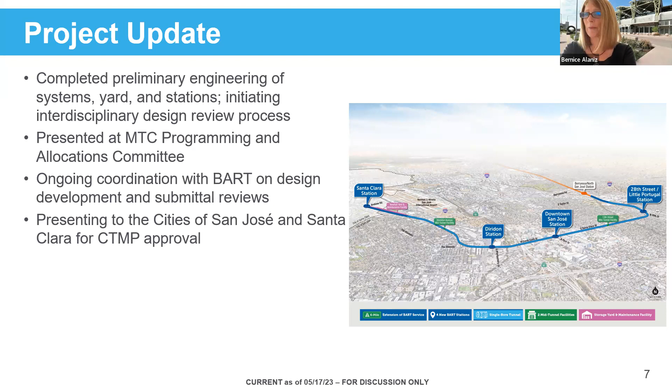And we've been doing ongoing coordination with BART on the design development submittals, as I mentioned, they review. We are the owner, designer, funder, but BART will be the operator, so we work in close coordination with them. And then we are presenting this month and next to both the San Jose City Council and the Santa Clara City Councils for the Construction Transportation Management Plan, which you'll get further details on today. We can go to the next slide.

So a funding update. As you may recall, earlier in the year we transitioned from what was the expedited project delivery pilot program to the traditional New Starts program—the program where we got the federal funding and executed a grant for $900 million on the Berryessa project. Right now we're looking at about a $4.6 billion ask. We entered that program in the first stage, called the project development stage. Next month we're actually going to make our application to get into the next stage, where we present our 30% design and get into the engineering phase of the FTA Federal New Starts funding program.

And then the final phase, which will be later this year or early next year, we'll be making the application for our full funding grant agreement. That is really the contractual agreement that states the amount and time frame of the money we're going to get from the federal government.

This shows our funding plan: a $4.6 billion federal share, $375 million regional share, $375 million yet to be determined, a little over $1 billion from the state, and just under $3 billion locally.

Tunnel and track work update. As we've shared earlier, we are delivering this tunnel and track work contract, the biggest of the 4 contracts, through what's called Progressive Design Build Delivery. Progressive Design Build means we bring the contractor on very early during conceptual design and work with them side by side through an open book process to advance the design.

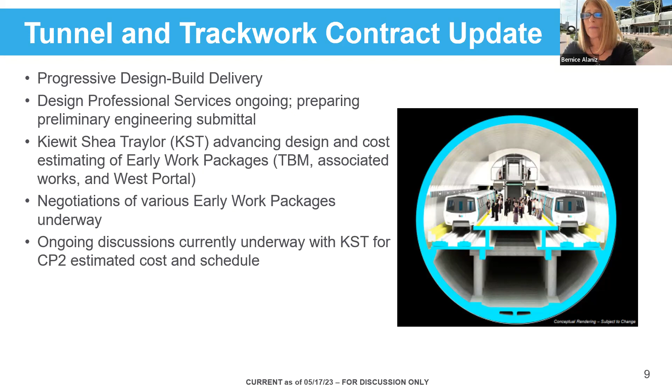We're still doing negotiations as part of this open book process. That allows the owner to have a little more control over the cost, and that's what we're working on right now: the updated cost and schedule.

These are the 4 contract packages I mentioned. The CP2 tunnel and track work contract is one of 4. While we went with Progressive Design Build for that, we are now going to pursue the other contracts through more of a traditional design bid build. We'll advance the design more on the project owner side, the VTA side, and then put those contracts out for bid. One of those is the systems contract — everything to make it an operational rail system: communications, electrical, all of that.

Then there's the Newhall Yard and Santa Clara Station in a separate contract, and then the 3 we call underground stations. That reflects the below-ground boarding, but they all have an above-ground portion, what we call the station head house, which is what we'd all refer to as a station building.

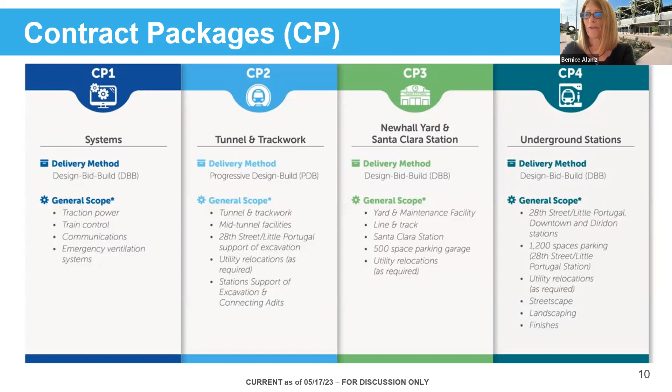Procurement look ahead — got a couple questions on this, so I'll clarify. We're looking to bring on a construction management consultant, who will oversee the management of the actual construction. They manage the contractors doing the construction and also do quite a bit of the QA quality assurance. We've had, since the inception of this project in 2016, a program management consultant.

They oversee the overall program, all of the aspects — they have staff putting together materials for the federal funding, they've been working on the design, and they direct our general engineering contractor that we also have on board.

We have all of our construction procurements — the second phase for the CP2 contract. Right now we're in phase 1 with the design, and we'll actually be awarding them when the tunnel boring work starts. Then we have the other construction procurements for those 3 other contracts I talked about, which will occur between 2024 and 2025.

This is our project look ahead. We're going out right now to 2028 with a 5-year look ahead. Right now we're just about getting to the point between 2023 and 2024 where we will request to get into the New Starts engineering phase. We start some early construction work right around the time we get our full funding grant agreement, mid-2024, and then we start major construction around the 2025 timeframe.

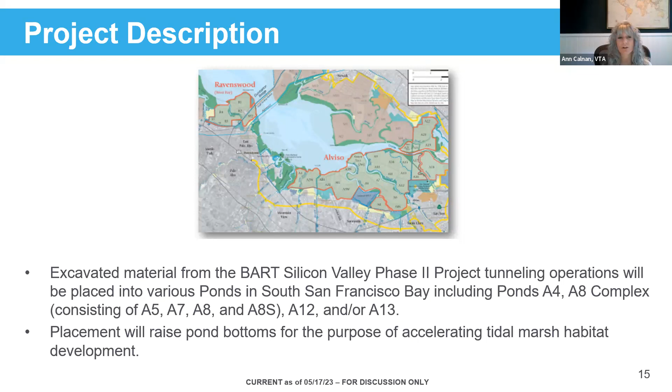There are several key benefits to reusing the tunnel material in this manner. Raising the pond bottoms to enable habitat restoration will help address sea level rise. If the ponds were to rely only on natural processes given sea level rise, the buildup of the pond bottoms and ultimate habitat development would take even longer. The project also addresses greenhouse gas emissions, as disposing the excavated material in landfills in the South Bay and beyond requires truck hauls of much longer distances. The EIR in the environmental document from 2018 called out disposing the material in landfills - there's quite a bit of material, and it cannot just go to local landfills, it has to go to landfills that are farther away. So the salt pond option for disposing this material is much closer, relatively, to the South Bay - close to the West Tunnel portal where all this excavation material will originate. It's about 7 or 8 miles away.

Speeding up the timeline for tidal marsh restoration will ultimately create habitat for threatened and endangered species. The excavated material will also cover existing mercury contamination in some of these ponds resulting from historical mining operations. Restoration of the salt pond also addresses flood risks. And lastly, the reuse project avoids wasting all this excavated material that otherwise would go to the landfills.

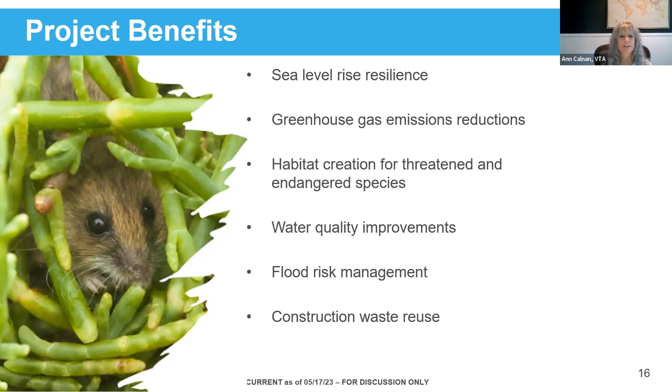What I'm showing you here on the left is the cover of the BART Silicon Valley Sustainability Master Plan, and on the right are 5 broad categories for what's called the Envision Sustainability Rating System. In July 2021, we finalized the Sustainability Master Plan, and in this plan it's noted that VTA is pursuing an Envision Platinum certification, the top certification from an organization called the Institute for Sustainable Infrastructure.

Reuse of the tunnel excavated material at the salt ponds earns us considerable points in the Envision framework in order to meet that platinum goal. Most notably, the points are gained in the natural world category and climate and risk category. Reusing the material at the salt ponds is the most sustainable option compared to other disposal options that have been suggested.

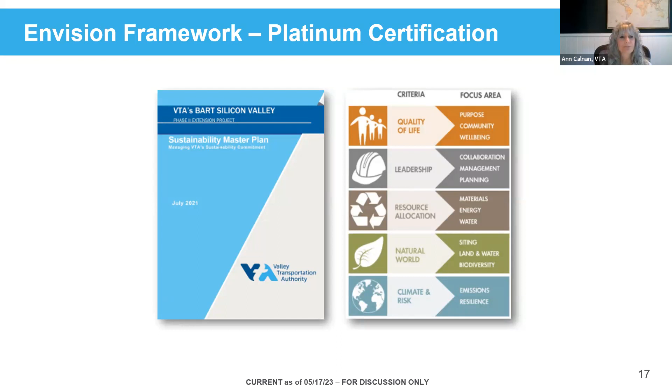The idea of taking the material to the salt ponds is not new, since we've been exploring it for a while, but it became real after we met with a regulatory group called the Bay Restoration Regulatory Integration Team. Those are high-level regulators, and we just met them in January this year. Following that meeting, they placed this project on their priority list. As a priority project, we will work cooperatively with the regulators to expedite project permitting, which is a critical path for project success.

Another update: the California State Coastal Conservancy awarded us $1.5 million in grant funding towards the environmental clearance and permitting phase for the reuse project. Just a couple of days ago, I talked to the California Wildlife Conservation Board about a grant for the design phase, which primarily consists of the construction methodology, how you place the material into the ponds, as well as work related to addressing the Water Quality Control Board's Quality Assurance Project Plan, or QAPP, to make sure that all the material placed into the bay is clean, with no contaminants that would harm aquatic systems in the bay.

Finally, we are embarking, including this tonight, on a robust community engagement process to get the word out about this project and to get feedback as well.

Last slide, I do want to highlight that this is a highly collaborative project with all the regulators, state and federal. There are partners, such as the Coastal Conservancy and Valley Water, which owns one of the ponds. The partnership to date has been very productive, and we're looking forward to continued engagement with these partners, as well as other interested stakeholders and the public. And with that, I'm happy to answer any questions.

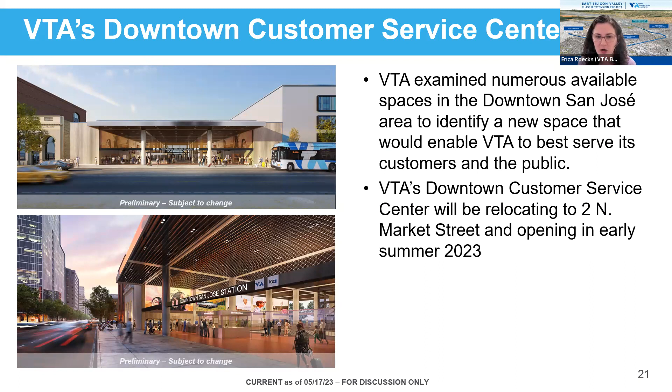A little bit more about what happens in the space: it serves the surrounding community and assists transit users with general inquiries and other requests related to maps, scheduling, purchasing Clipper cards, applying for regional transit connection discount cards, etc.

In addition to relocating the customer service center, we will also be opening a phase 2 project public information office at the same location before construction begins in the area. At this office, members of our project outreach team will help educate and provide updates to the local community about the progress of the project. As for the 28th Street station area, we are still actively looking for space for our public information office there, and we're open to suggestions if you have any. That's the update on the customer service center and public information offices.

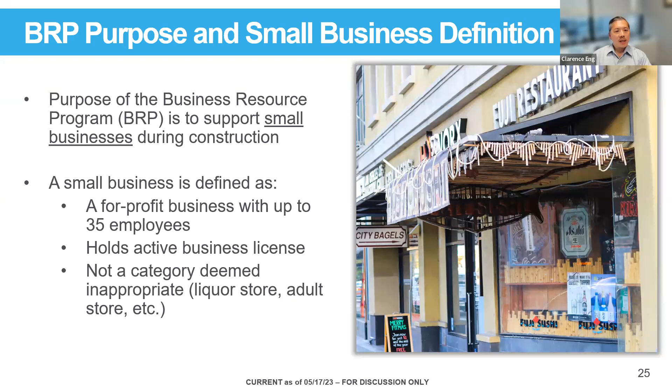In developing the business resource program, we've interacted and discussed with the VTA Small Business Task Force, including a presentation earlier this week. We've evaluated other case studies in terms of business assistance around the country, conducted interviews with business resource providers to understand what resources they can provide, and surveyed small businesses as part of the CTMP to get a better understanding of their needs. We've also consulted other transit agencies who have delivered similar business resource programs and identified what worked, what didn't, and lessons learned navigating the process.

You'll see some of the results. A foreshadow is really just trying to help those smaller businesses as quickly as possible, and so VTA has really tried to be nimble through this process.

As part of the plan development, we've identified, with the help of JC Lacey, four program elements: shop local marketing, signage and wayfinding, small business resource connections and support, as well as direct financial assistance. I'll walk through the next series of slides showing how we've refined that and taken a closer look at how it may apply in this area.

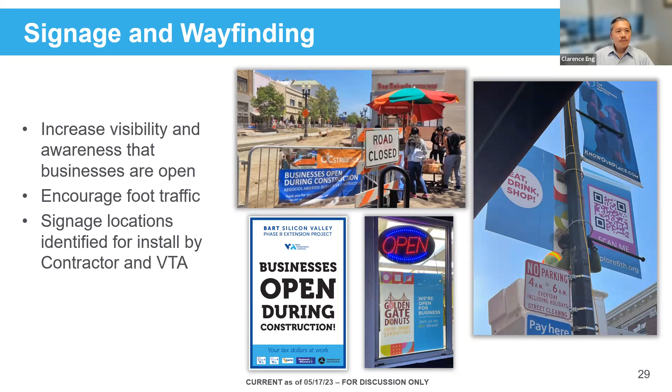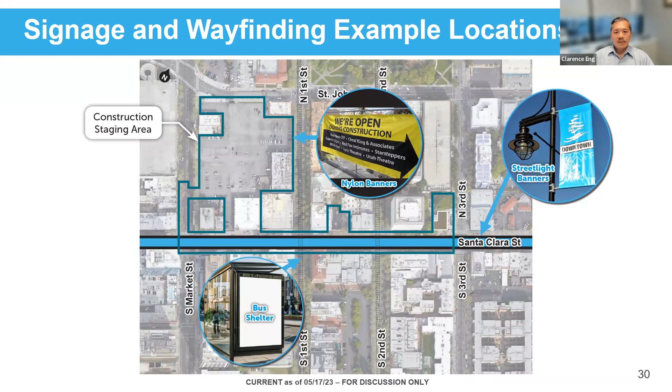The third element is small business resource connections and support, trying to rally around and create a sense of support for these smaller businesses, having a referral list of small business organizations that provide existing services, from accounting to web support and things like that. VTA will sponsor open houses enabling business owners to meet up with these business resource providers and help provide additional support for their business.

Additionally, web-based training events - there are a lot of different resources that we've identified and that we'll be bringing to the community and the businesses through this initiative. These first three are really intended to be implemented prior to the start of construction, helping the businesses be more resilient through the construction phase.

The fourth element is small business direct financial assistance. There will be funds available to support small businesses through grants, meaning eligible small businesses located adjacent to the above ground construction and staging areas. Much of the construction will happen underground with tunneling, but these are areas where we may experience different disruptions - sidewalk closures, obstruction of signage, parking removal, and lane closures are some of those potential disturbances.

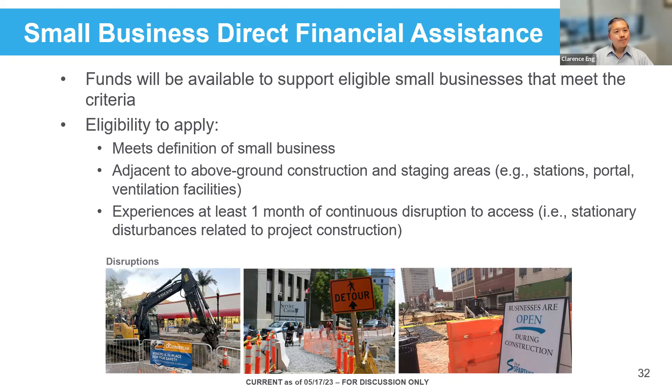So what does that mean? We've identified, and some of the details are still being worked through with VTA, a tiered assistance approach where after an initial one month of continuous disruption, businesses have access to a lower amount that can be awarded with very minimal requirements - really having a low bar enabling these businesses to have access to these funds.

And with additional disruptions, a greater amount, as well as a little bit more documentation of those disturbances and impacts. Those applications will be reviewed by the VTA program manager, and that may be a third party if there are technical financial elements that need to be verified. But really the key is to try to get these resources to the community and these businesses as quickly as possible.

This business resource program will be administered leveraging a business liaison team. It's important to have folks on the ground being a conduit between VTA and the business owners. At the start, before construction begins, we'll be regularly visiting businesses, creating those relationships that can be leveraged throughout the construction period.

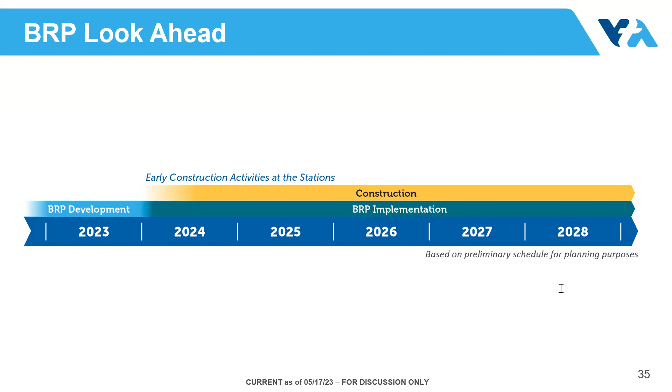Go ahead, Clarence. The reason that question's being asked is because I believe when we had the BRT, if you accepted the business interruption fund, you signed a legal waiver document saying that you would not sue VTA. We haven't talked about that, but I imagine when we meet with VTA legal that we'll get some direction to something similar. Thank you.

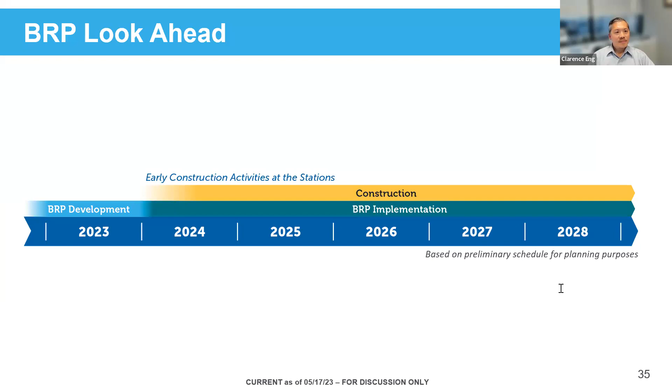There is also a question in the chat. I don't think that's a business resource program question. The question is, how is VTA helping businesses in downtown who are being asked to move out? In what ways are they being helped financially and to find a new place to locate? VTA Real Estate is the department in charge of that work related to property acquisitions for the project itself. We've shared some high-level information about that in the last round of CWGs, in the slide. We can talk with VTA Real Estate about getting a fuller answer back to this group.

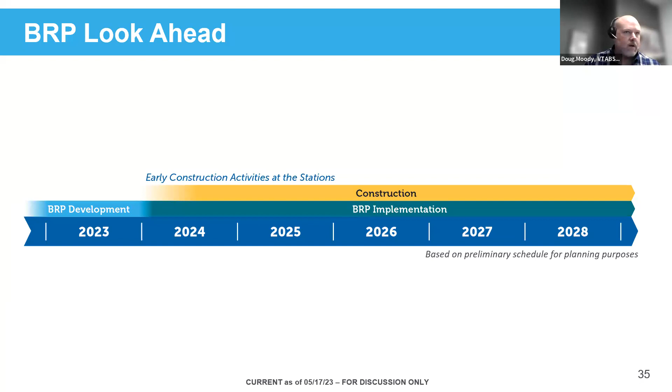That is it for the business resource program, unless there's other questions or comments. If there aren't, we're going to switch over to Erica to give an overview of early construction activities. Let me confirm. Nope, there's the one question that we just answered live. So Erica, over to you.

Great, thank you. So I've talked to you all about the construction transportation management plans multiple times before. If we can go to the next slide. A reminder that the purpose of the construction transportation management plan, or CTMP, is to minimize and reduce to the extent possible construction related transportation impacts to all modes during construction.

Many of you have seen this graphic here on the screen before, so I just want to quickly remind you of the development process for our contracts package specific CTMPs. I'm going to walk through some details of the first one on the coming slides. During the development, as Bernice mentioned earlier, Kiewit Shea Traylor is on board, the contractor for the tunnel and track work contract, which is contract package 2 or CP2. So during the development of the CP2 specific CTMPs, there's regular coordination between the contractor, VTA, and the cities.

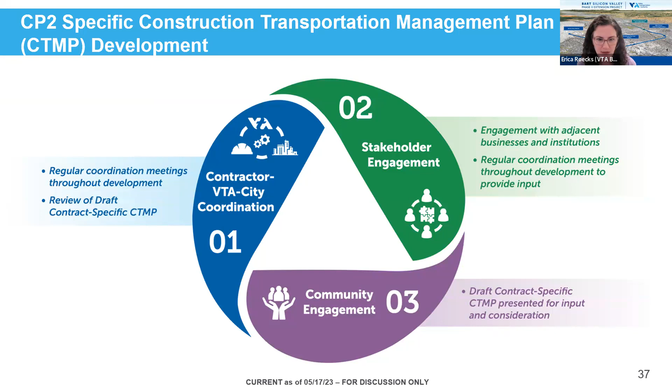In addition, there's stakeholder engagement regularly with adjacent businesses and institutions throughout the development of the CTMP, and the community was also engaged to provide input and consideration at a community meeting. In the next slide, we'll show you some pictures there.

We had our early construction activities public meetings in March that we talked to you all about in February at the February CWG. So we had an in-person meeting as well as an online meeting, and the materials are now posted online there at the link. If you didn't get a chance to participate or listen already, you can check it out there. So we connected with the general public and shared information about the early construction activities that will be happening at the West Portal site over the next couple of years.

We had over 50 folks attend the public meetings and were able to answer questions from project staff as well as a panel of the KST folks. We had a positive outcome and generally positive feedback at the meeting. Now I'm going to walk through some of those details at a high level with you here.

The goal of this early construction timeframe, which is the first CTMP that KST has developed, is for the next couple of years at the west portal only, which I'll show you on a graphic, within VTA's Newhall Yard property. The goal of this early construction activity is to prepare the site for the tunneling operation, so when the tunnel boring machine will operate and build the tunnel. The West Tunnel Portal is the beginning of the 5-mile long tunnel.

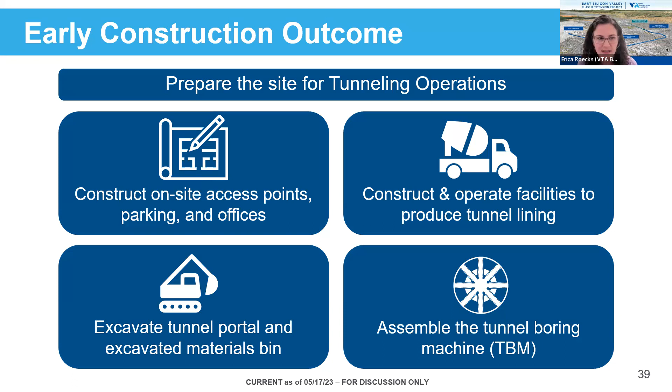Some of the activities that will happen during this 2-year preparation include constructing the on-site access points, the parking, constructing and operating a tunnel lining factory where the segments will be built, assembling the tunnel boring machine, and excavating and preparing for the tunnel boring machine. We'll go into detail on the coming slides on what that is.

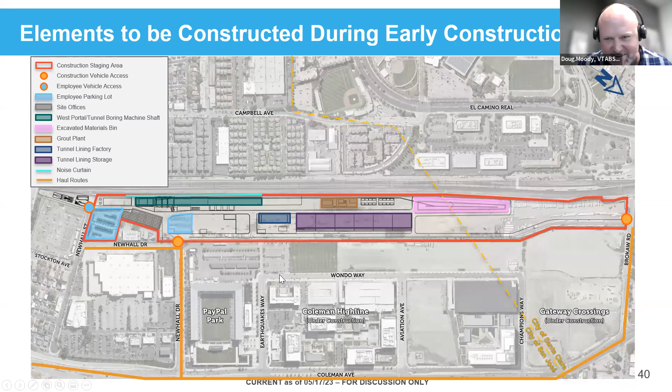I can cover the activities happening during the early works. Is she back? This is the site for the future yard, and these are the various activities that will occur during the early works, as we're calling it. Most of the activity will be in support of enabling the construction and launch of the tunnel boring machine, and to create and fabricate the liners for that tunnel boring machine.

In the area shown in dark turquoise, that is the launch site for the tunnel boring machine, and the light turquoise is where the future noise curtain will be. The light pink area on the upper right is where the excavated material bins will be, where the materials come from when they do the trench to create the large launch site for the tunnel boring machine.

That will go into that bin. The blue over on the left is where there's parking. We get lots of concerns about construction parking, so just wanted to demonstrate that we have construction parking for the craftspeople and staff that will be working there. The purple in the center is where the tunnel liners will go.

There will be a tunnel liner factory in the blue building, kind of mid-center left. That's where they will actually construct these big, huge, massive cement tunnel liners that the tunnel boring machine will place. They weigh 40,000 pounds each. It takes 9 of them to make a full circle - it's either 6 or 9, and they can do 6 or 9 segments total per day. So they will be manufacturing kind of a stockpile of them because they can't make them as fast as they'll have to place them. So in the early stages, we will be building a supply of those tunnel liners.

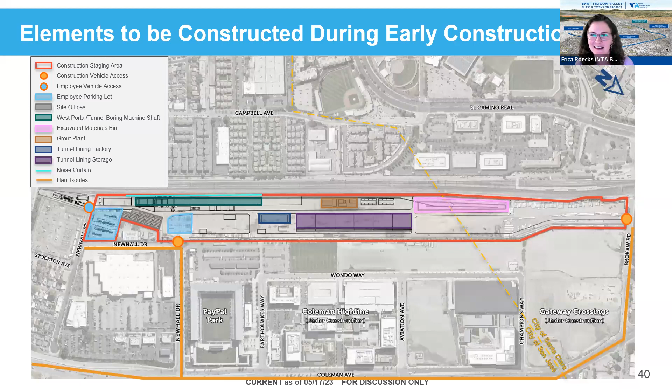So let's go to the next slide.

Additional mitigations related to construction equipment and operations that the contractor will be implementing include turning off idling equipment, lining truck beds with materials to reduce noise, covering hoppers, bins, and chutes with sound deadening materials, and installing low impact backup alarms for use during nighttime hours, so it sounds more like a swoosh than a beep. Those are some of the examples of things that are being done.

If you go to the next slide.

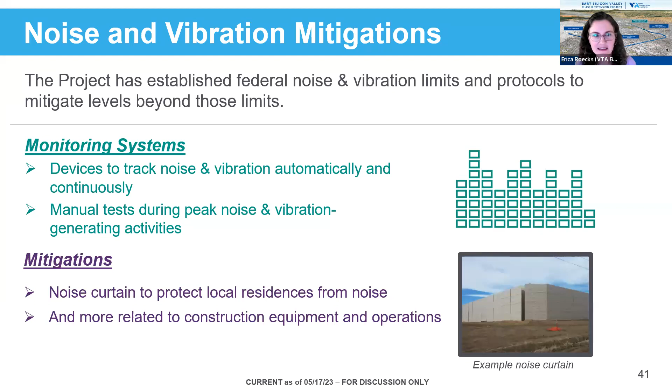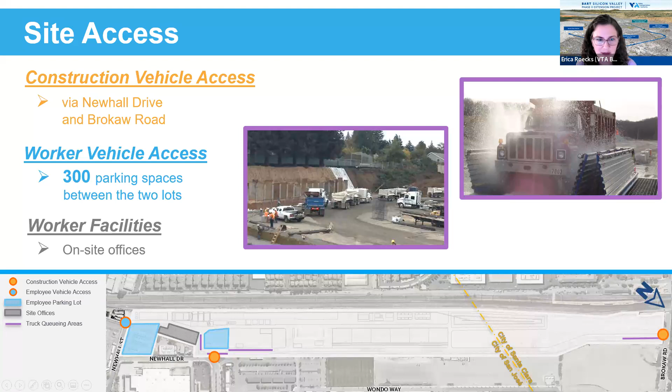Next slide. So at a high level, as all these activities are happening within VTA's property, from a transportation perspective, likely what you'll see is increased truck traffic in the area, some construction signage, and behind the fencing screening, activities happening within the yard for extended hours, which I'm going to touch on more in the next slide.

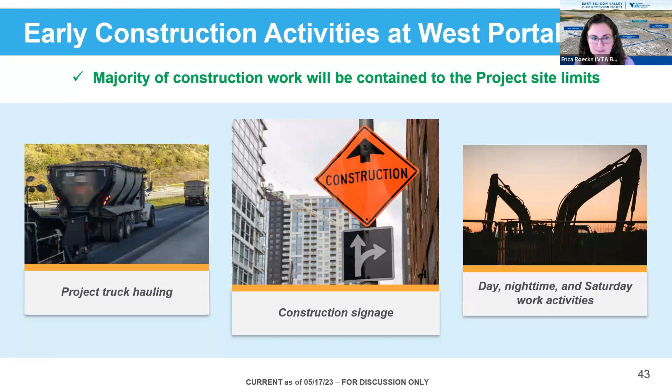Double shifts begin at 6 a.m. in the morning and last until 4 a.m. And Saturday is 6 to 6.

Now we can go to the next slide.

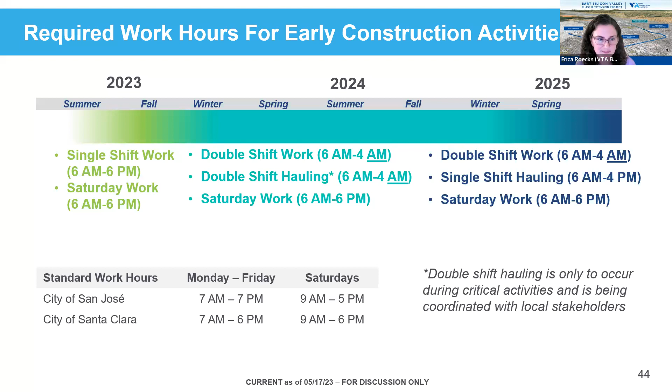Before the launch of the tunnel boring machine, 360 segments need to be constructed or fabricated. There are 9 segments that create a ring, and the factory can fabricate 6 segments per day. So 360 need to be fabricated before the launch, which is only 13% total of what will be needed.

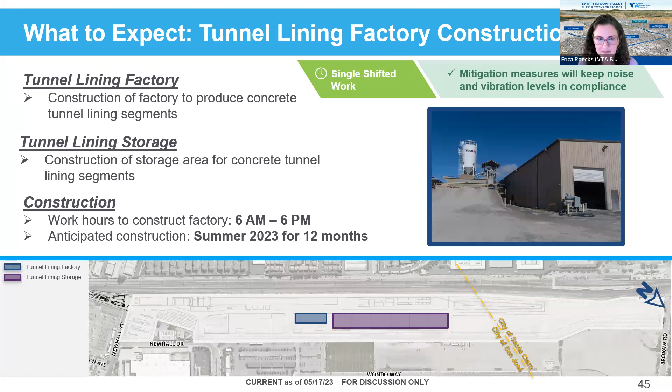The fabrication within the building helps to reduce the production sound. The factory must keep up longer hours to ensure the production of segments keeps pace with the daily use of the tunnel boring machine. So the factory will operate from 6 a.m. to 11 p.m. from the fall of 24 through major construction.

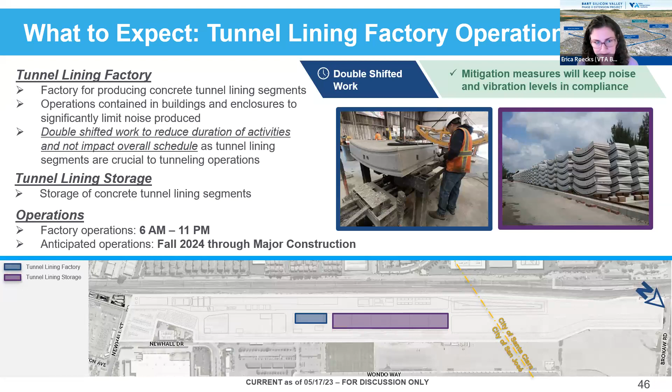Next slide. In the following slides, we're going to give some more details and images associated with preparing for launching the tunnel boring machine, which will begin the preparing of the site in order to launch, starting in fall of 23 for about 14 months.

Here on the screen, on the left is a picture of a tunnel boring machine being assembled, and on the right is a picture of some of the equipment required for those deep slurry walls with some rebar cages there.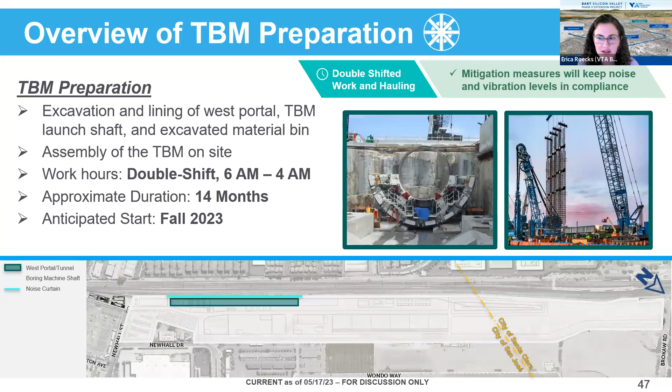If you go to the next slide. The support of excavation, or SOE, is required as part of the preparation for the tunnel boring machine. SOE construction creates the concrete walls below the ground to aid the excavation and create space for the tunnel boring machine to be assembled. The support of excavation construction of the TBM shaft and the portal is the area shown in green on the graphic at the bottom.

This requires using excavation equipment, trucks hauling concrete in and excavating material out of the site, and other heavy equipment to dig the slurry walls 160 feet deep and to accommodate the 80-foot excavation that the TBM will launch from. This will be double shifted work, 22 hours a day, with double shifted hauling to accommodate the critical concrete pours in the complex sequence of work required to build these shaft walls.

And the image there on the right is that image of the sound curtain again.

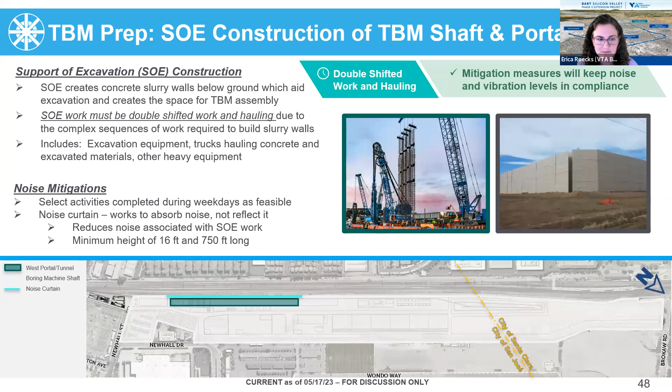Next slide. The image here shows an example of an excavated materials bin, which is where the soils will be stored eventually during major construction. This phase of work requires excavating the existing soil in the area at the placement of the bin, followed by lining and installing retaining walls to further build out the bin.

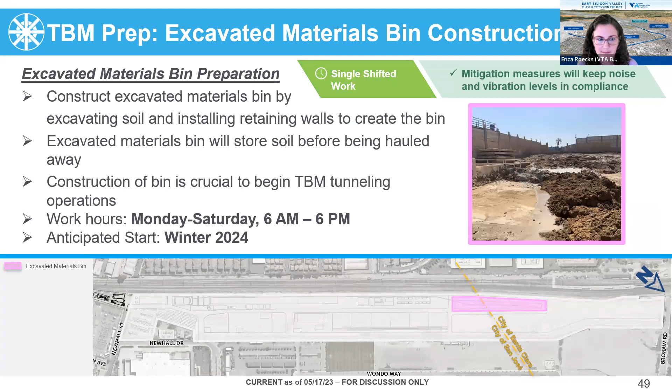In order to begin digging, the TBM requires a launch structure to push off of, and this is where the TBM support structure comes into play. It helps to push the TBM forward until it's able to propel itself from the tunnel liners that have been installed. The image on the right shows the launch structure, support around the tunnel boring machine, and the image on the left is of the tunnel boring machine as it's starting to move.

The launch platform construction must be double shifted and completed before the tunnel boring machine arrives on site to be reassembled on that platform. When the TBM arrives, work to assemble it will be double shifted to ensure that tunneling begins. The work to prepare the support structures and assemble the tunnel boring machine is not anticipated to produce high levels of noise.

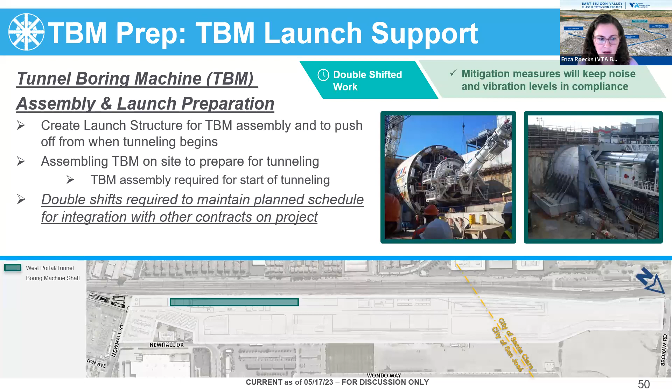Next, we want to mention some of the ways that we'll be reducing dust in the area. As we all know, construction creates dust in the air and such.

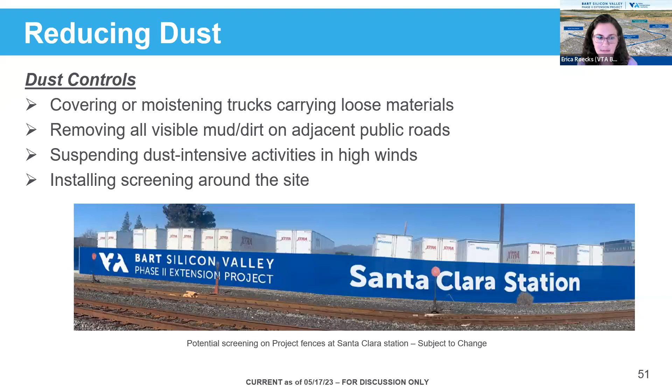The contractor will be covering or moistening trucks carrying loose materials, suspending dust intensive activities in high winds, and removing visible mud and dirt off the trucks and on the adjacent public roadways, as we showed in the pictures earlier. In addition, we'll be installing screening around the site. An example of what this could potentially look like is what you see here on the bottom, which we're working through right now in advance of construction.

Lighting is critical to safe construction operations when we're operating 22 hours a day. But in order to minimize the ambient light affecting nearby residences and businesses, we'll be using lights that direct downwards towards work activities, similar to what you see here. The number of lights will be minimized to the extent that construction safety allows.

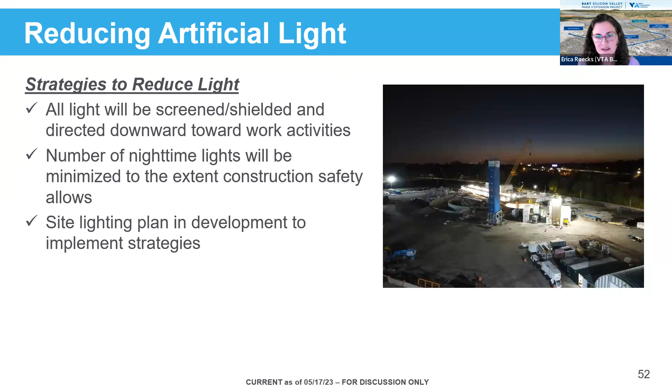There's a site lighting plan in development to implement the strategies described. So those are some of the details of what's happening in this first time period of 2 years for these early construction activities. Just for the CP2 contract alone, there are 4 CTMPs anticipated. This covers the early construction activities at the West Portal.

KST has already started to develop the next CTMP, which covers early and major construction at Diridon, Downtown, and 28th Street Little Portugal stations. They anticipate a CTMP to cover major construction at the West Portal once the tunnel boring machine launches, and then a 4th one for the East Portal.

In addition, once the additional contractors come on board, there will be more CTMPs, and we will be coordinating with several of you in the very near future on some of the details that KST is developing related to major construction in the 28th Street Station area.

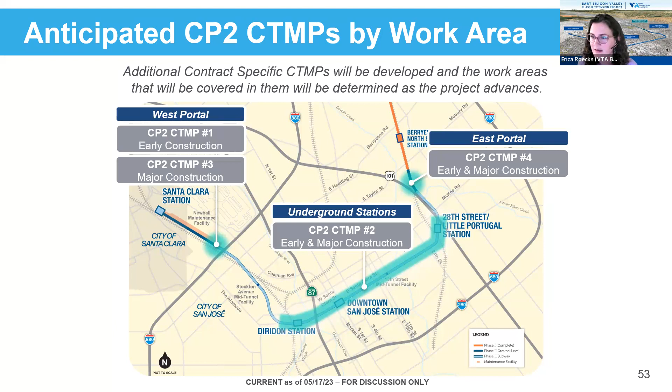I think I just have a couple last slides here to cover. Our project team will be performing construction related surveys and monitoring. We've talked about the historic building monitoring program here before throughout the project. The goal is to assess and develop a baseline of the current architectural and structural conditions, perform monitoring throughout construction, and conduct post-construction surveys. This is something we did some initial research on before, but are starting to dive into deeper now that KST is on board.

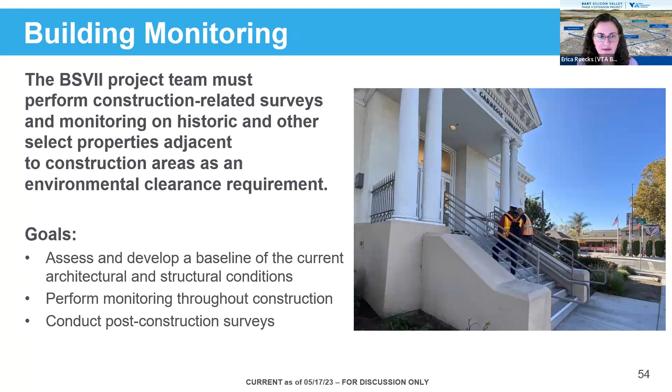Some of the activities for building monitoring that will be happening in the future include general assessments, surveys, pre-construction surveys, air, noise, and vibration monitoring, and property protection instrumentation and monitoring. VTA is coordinating with specific property owners as needed to conduct these activities over the next couple of years, and we'll be in touch potentially as needed. Just wanted you to be aware that we're advancing this program and making sure that we're protecting properties as we advance and begin construction.

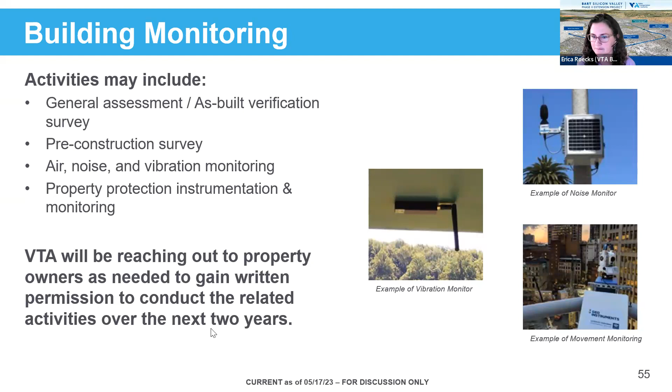Okay, moving on to the CWG member report back. Next slide, please. As I mentioned, this is your time. We want to hear from you about what you've been sharing with your community about the project and what you've been hearing from your community. It's also your time to ask questions you may have, or make comments. So if any of the CWG members would like to use this time during a report back, please feel welcome to do so. And as normal, please raise your hand or drop something in the chat.

I can share a little bit. Carlos was a big advocate of getting student voice involved too. We're working with Site Lab right now to have them come on site and take over one of our AP classes after testing is done, give a presentation to a few students, and then meet with a couple of our leadership members to weigh in more on the urban village plan. We're also continually sending out communication to families and staff about surveys and other information.

Great, thank you Marcos, and thank you for doing that. Thank you for playing your role as a leader of your community to keep your community informed. David.

I'm getting more regular questions about, hey, is this thing going to happen? When is it going to start? When are we going to start seeing demolition? So I just tell them what I know, and they seem to be happy enough with that.